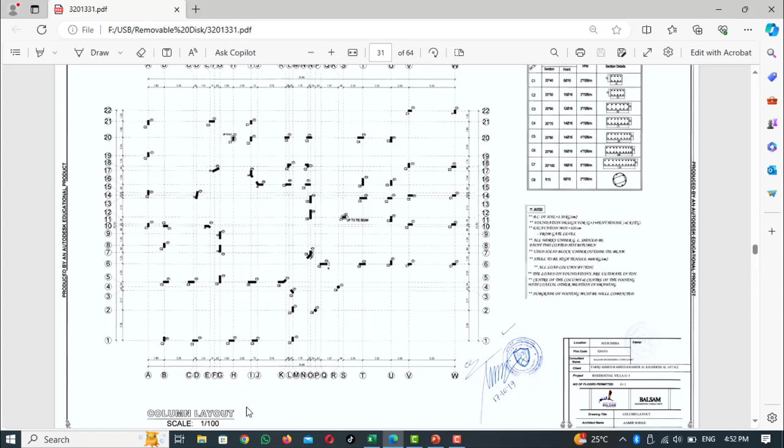column layouts in your drawing. For this, first of all you will just come to the schedule of columns.

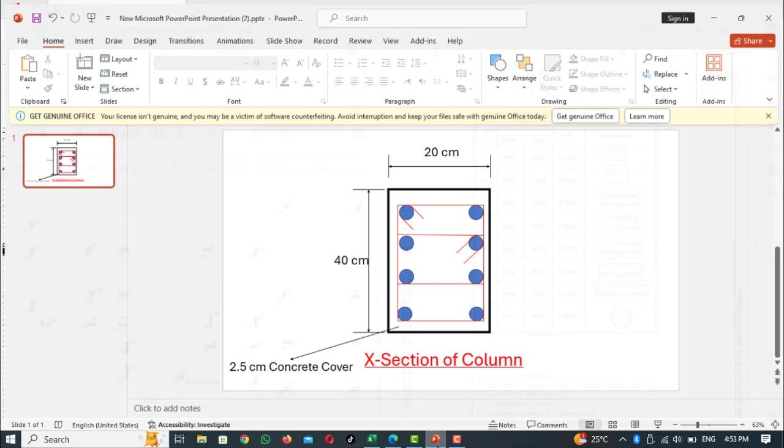This is our column and this is our first stirrup, like that, and this is our second stirrup. So there are 2 stirrups for this section.

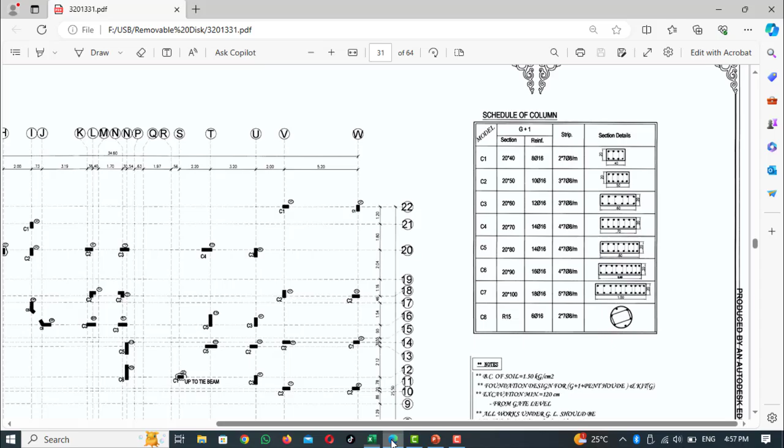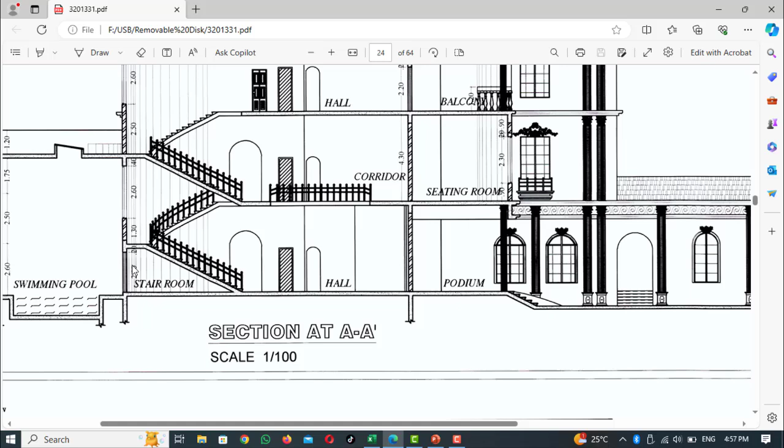So for this you will put another value, like if there are 10 columns and 8 number of bars, you will put 80 number of bars. Length of one bar, length or height. What is the height for our bar? So for this you will go to your drawing and you will open your cross section of your building or villa or anything that you are making. So for this you can see our height is 4.5 and 4.3 meter.

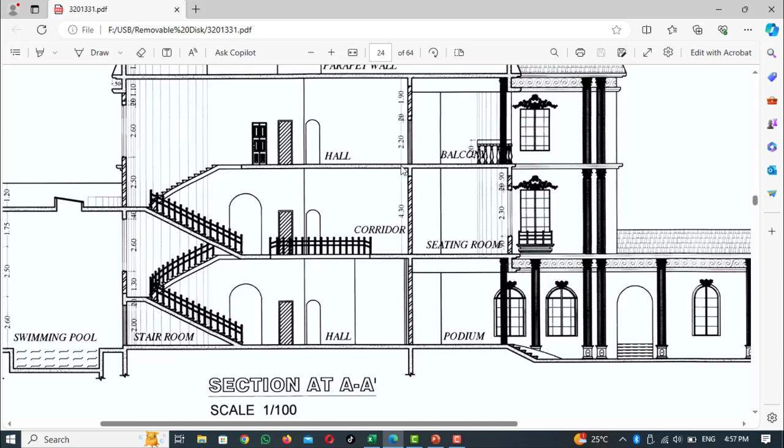So the total length is coming 5.7 meters. Okay. After that, how will you calculate the total length? Press equal, length of one bar multiply 8, enter. So the total length is coming 45.6 meters.

Weight in kg: you will press equal, multiply, shift 8 is the multiplication, and the unit weight is 1.58. So the total weight is coming 71.98. So the total weight is, say, 72 kg.

After that, you want this value in tons, so press equal, select this cell, after that divide by 1000, because there are 1000 kg in 1 ton. So press enter. So it comes 0.071 ton. This is coming in tons. So this is how to find the weight of steel for the column, for the main bars.

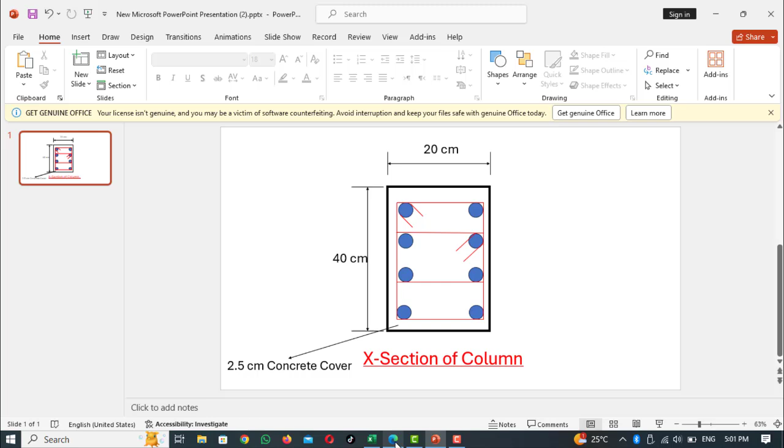And there are hooks. For hooks, I already discussed the formula 16D. You can multiply it, so the total length of one bar for the stirrup is coming 1 meter. Okay, after that, what is the number of bars? So for the number of bars for one column, you can multiply.

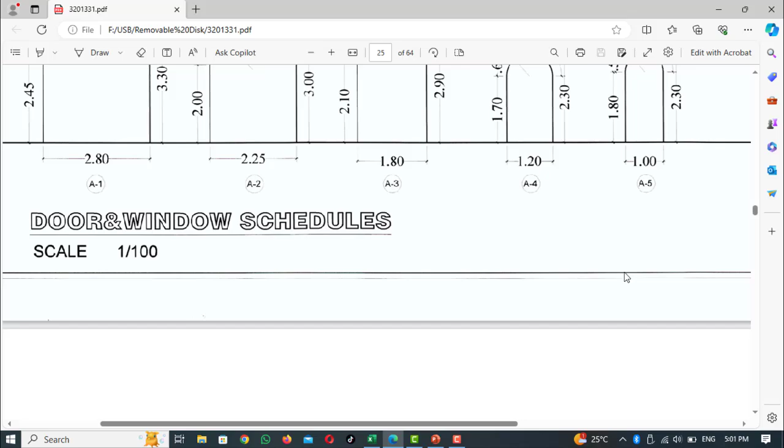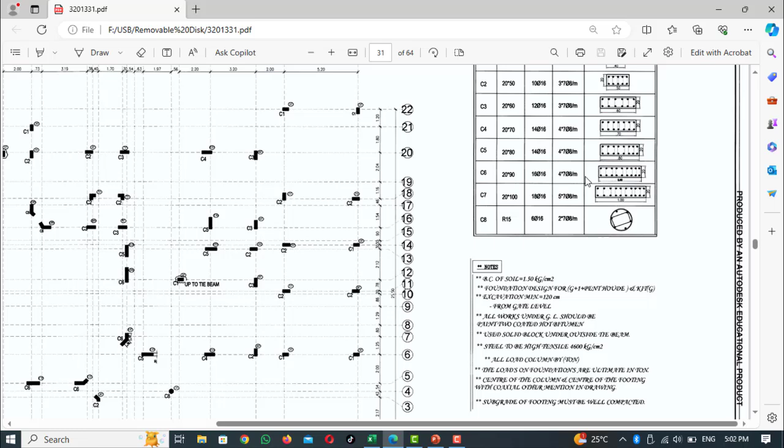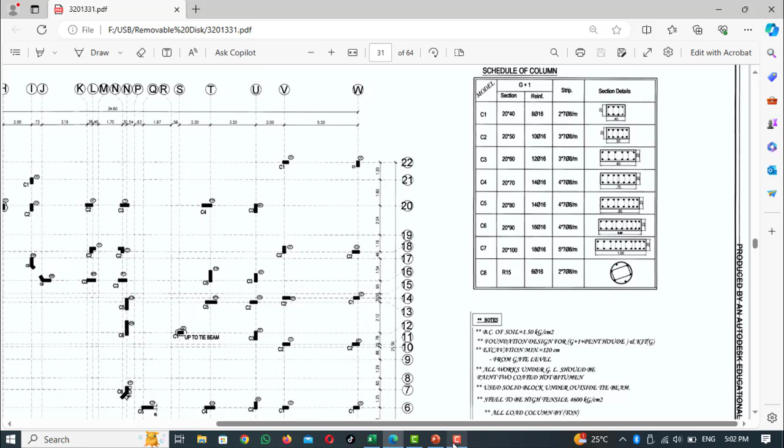You have 7 stirrups. Where is the schedule? Here in the schedule, as you can see, there are seven ties in one meter. So you will multiply this value with this. 7 in 1 meter. And what is the length of one bar, or height? 5.7, right?

So equal, this multiply this, 39.9, say 40. So you can write here 40. How do these values come? Because in 1 meter there are 7 stirrups, and for 5.7 you multiply this with this. So you will find the total number of stirrups.

After that, the unit weight you can bring down, so your formula will come automatically. So here we have 8, you can bring this down also, because our dia is 8 mm. The total length you can bring down again, so it will come 40. Weight in kg, bring it down. Weight in tons, bring it down.

So this is the method for finding the quantity of steel by using your Excel sheet. Easily you can find the quantity of any structure in your drawing. So first of all, you will go to your schedule. After that, what is your dia? Unit weight I discussed already. Number of bars, how you can find it for stirrups and for your column main bars. After that, your weight for the stirrups. So this is how to find the quantity of steel for a column.